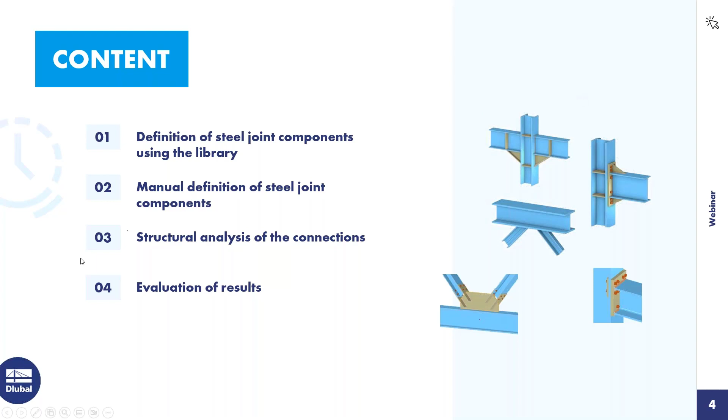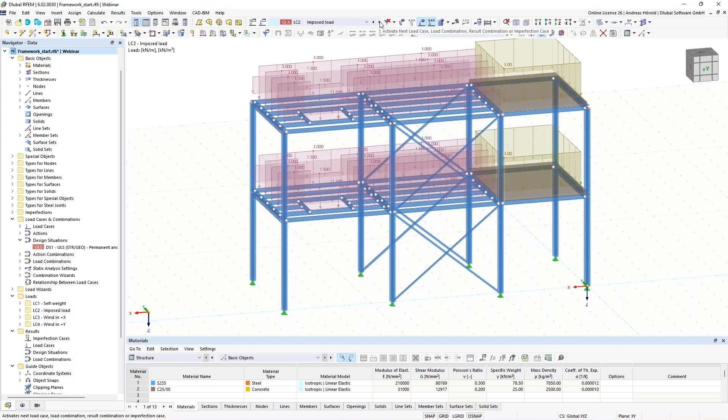Now I turn to the program, RFEM 6. A simple model, a framework with frames in one direction and bracings in the X direction. We have several load cases, for example the self-weight load case, the imposed load, and two wind load cases, one in X direction and one in Y direction.

We also have several combinations and a design situation. To design the steel joints, I activate the add-on here at the top left under base data. I open the dialog, and under add-ons it's already activated - it's from my test. The standard is also already set for the load case classifications, standard, and national annex, in this case for Germany, for the steel joint design.

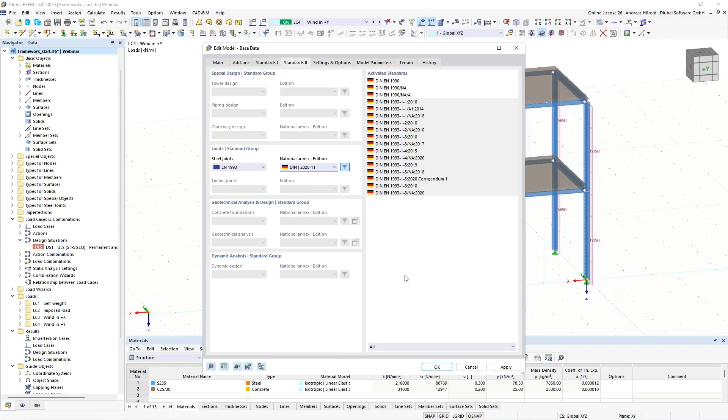Once the add-on is activated, there are two new folders: the types for steel joints, for the creation of the joints, and at the bottom the steel joints design, with design situations and ultimate configurations. I will show you that component, the ultimate configuration, in the next dialog.

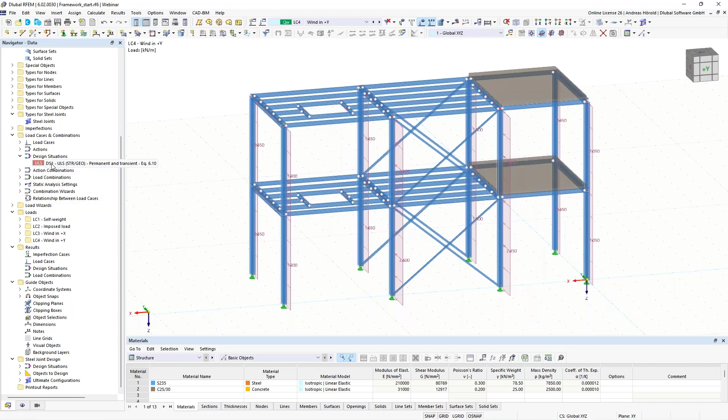But before that, I go to the design situations. You can see again the load cases here, the actions, and the design situation. It's important that if you activate the add-on, by default the steel joints design is activated - just note that it is here. Then those are the action combinations and load combinations, and those load combinations are included in the design situation. You can see that here in the overview.

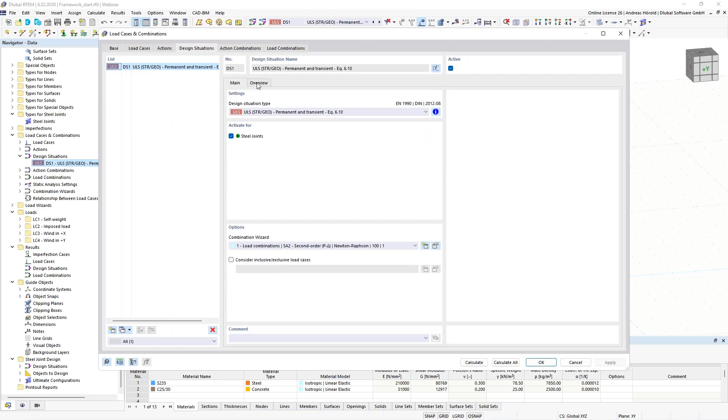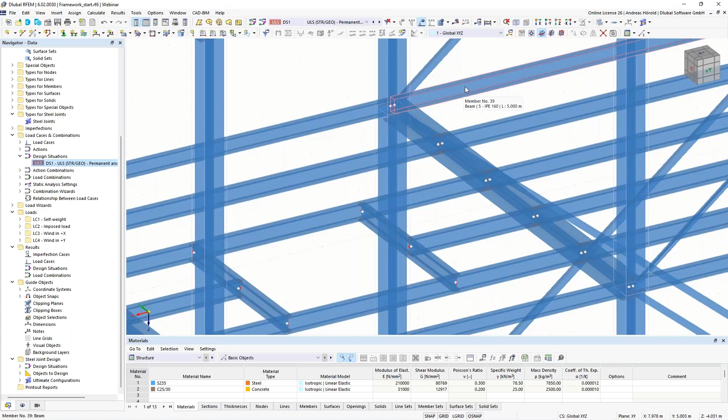So we can leave the dialog and start with the first steel joint. Let me show you that in the model. I would like to use this node here, and I will define all connections for it: the rigid connection of the steel frame, the pin connections of the platform beams, and the two connections for the bracings, which are L sections.

Let's start. Right-click on steel joints on the left side in the navigator data, and select new steel joint. First I select the joint, the node - sorry, node 33, and I apply that. There are 7 members that have their end or start point at that node. We can click through them.

Member 1 is the platform beam. That's the bracing, the frame or horizontal beam of the frame, the upper column, the lower column, the other platform beam, and the upper bracing.

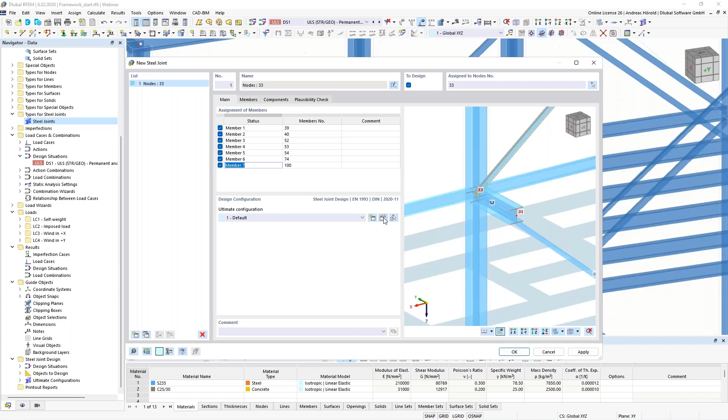Here you can see the design configuration. I open it - you can perform a buckling analysis. Then you can see the standard settings here, the maximum number of iterations - you can increase that, for example. Then you can also increase the number of load increments.

That's the standard setting, limit plastic strain, that's the value from the standard, and so on. I leave all settings as they are, also the safety factors here.

If you want to perform a buckling analysis, you can go to that dialog. You can also increase the number of lowest eigenvalues and number of iterations. That's the limit load factor from the standard, it's 15 according to the Eurocode.

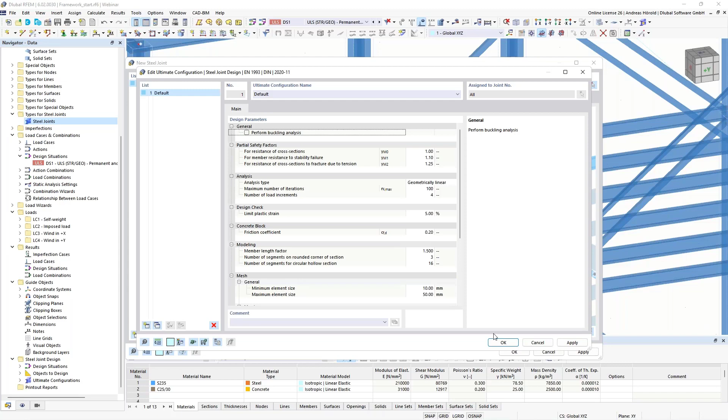Okay, then we go to the next dialog, members. The finite element analysis requires at least one member to be supported.

I select the lower column. The column is in reality supported here, and I will support at least this column. Okay, and we define also that the column is continuous. That's automatically overtaken for the two columns.

So the member settings, you can see here the member settings from RFEM, S235, and the sections, and we overtake the sections, of course.

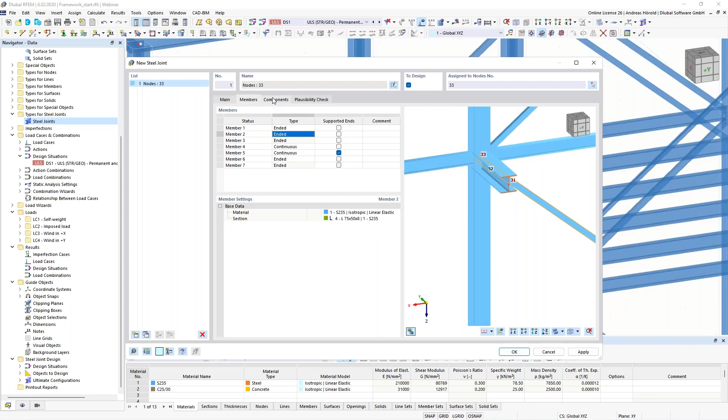So then under components, you can use the library, and you can create single components. I open it. You can see 4 categories.

The modifications: member cut, plate cut, we will use both of them. Then the plate editor: plate, stiffener, haunch, and so on. Then under connection elements: end plate, fin plate. Under others: the auxiliary plane, a help plane, then the welds and the fasteners.

Yeah, that's the current state of that library. We will extend that library continuously. A team of 8 members or employees are working on the development of the add-on steel joints.

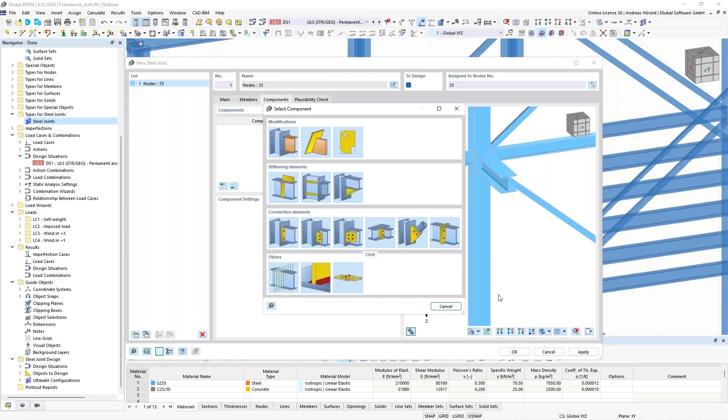We also extend the templates. I go to the template library. So there are also 4 general categories: the rigid connections, the pinned connections, truss, and the bracings.

I click through some examples: beam to beam, beam to column, with haunch, such a connection. If you download a trial version or you already bought the program, you can click through the single components. Maybe cross joint.

Okay, I will show you some pinned connections: beam to beam with cleats, fin plate, short end plate, beam to column, the same: cleats, fin plate, short end plate, and so on.

Trusses, you can use that for diagonals or for bracings. The K-joint, welded, such a connection. Also for bracings to use welded, it's quite new.

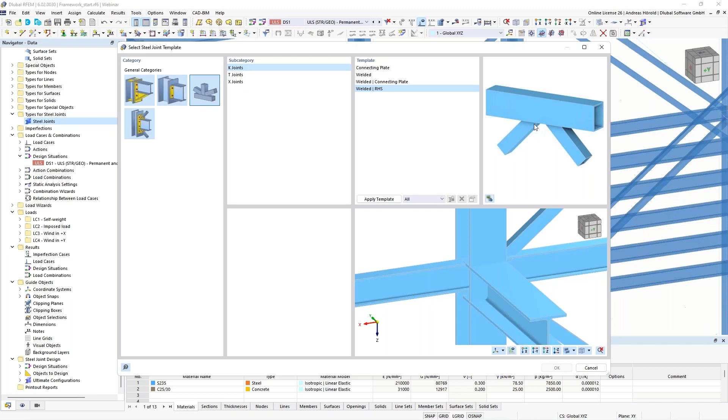The rectangular cross sections with a weld, T-joints, X-joints, and so on. Then last but not least, the bracings. Similar connection, such a connection.

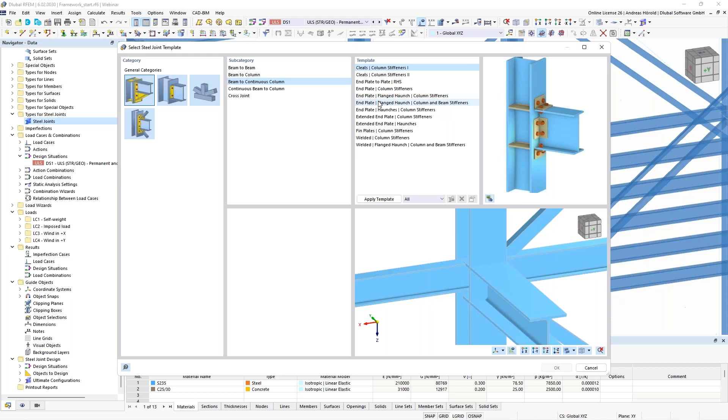But we will start with the first connection, the rigid connection. I use here the category rigid, beam to continuous column, and this one, with a haunch and column stiffeners. If I apply the template, we will see it in the preview here right at the bottom, and you can see we have to modify that connection. We leave the dialog with OK.

And we go through the single components. So I extend the window a little bit. Okay, so then we start with the end plate.

Member 3 is okay, you can see member 3 is selected if it is chosen. Then the reference member is the column, you can see it's selected.

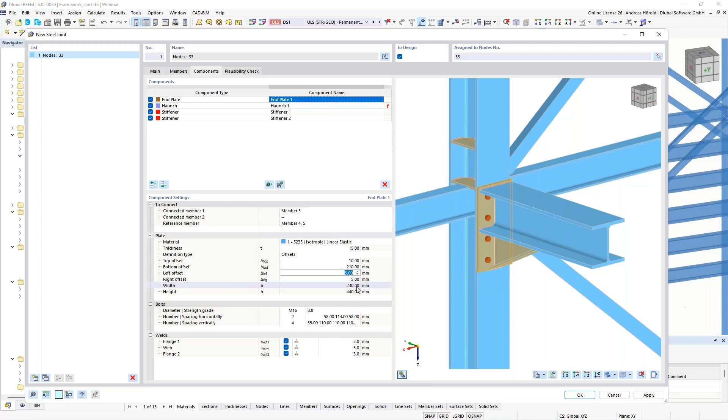We use a thickness of 15 millimeters, then 210 millimeters bottom offset. Left offset, We don't need an offset, we say 0. Okay, on the other side also 0. The rest is quite okay.

So then the bolts, we use a diameter of 20 millimeters and a screw strength of 10.9. So then you can use our values here, it's quite okay for this connection.

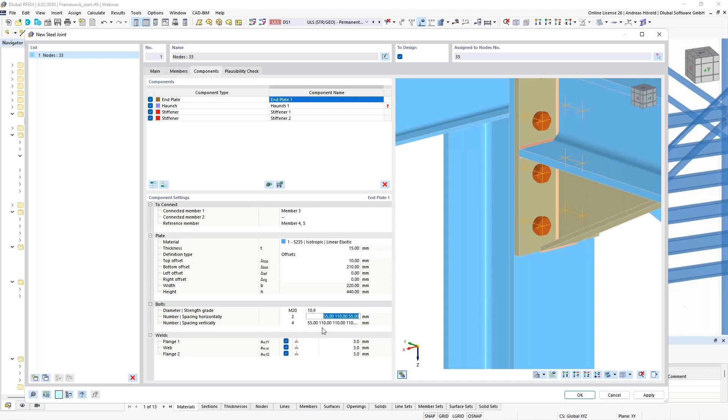I will only change the vertical spacings, I use only 3 bolts. Okay, and I only entered the first 3 values: 70, space, 95, space, 150, and the last dimension is calculated automatically.

Okay, then double fillet welds for the flange, 6 millimeters, then 4 millimeters, and also 6 millimeters.

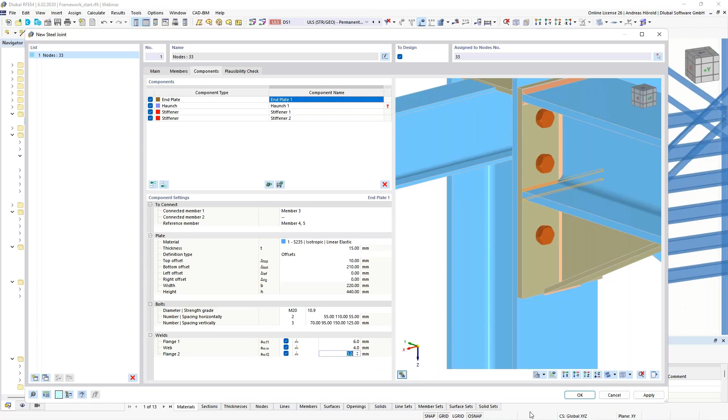Okay, now but you can see we have to modify the haunch, that's the next step. So member number 3, that's okay.

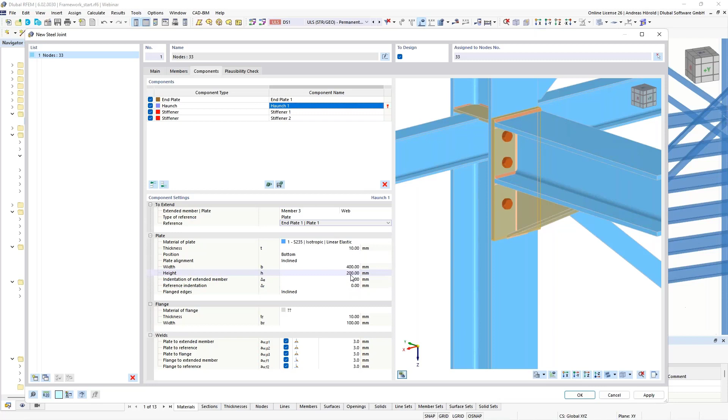So then plate is also okay, and plate 1, that's okay. So the other values are also quite okay. I decrease that value, okay, and you can see now it's okay.

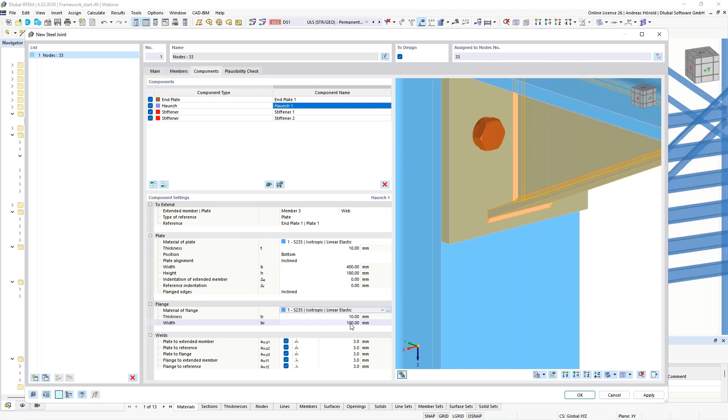So then I have to define a material for the flange, we use also the 235 steel. So then the width can be larger, 200 millimeters in that case. Okay.

So then the welds, that weld here, you can see it's selected, 4 millimeters. Now we can leave the double-fillet weld. Then this weld also, the double-fillet weld, 4 millimeters.

Then plate to flange, this one, also 4 millimeters. So then the flange extended member.

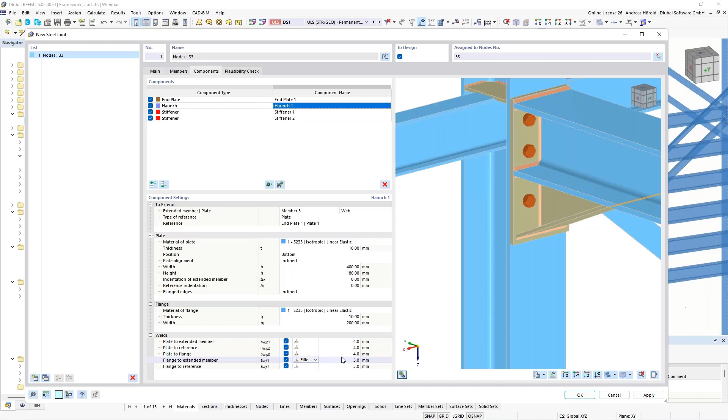Now this one, we use another weld, a butt weld on the rear side. And for this flange to reference weld, we use a double-fillet weld, 5 millimeters.

So the haunch is quite okay, but the stiffener is not. That stiffener should be adjusted. Let me check the values. Yeah, okay, I only defined a weld of 4 millimeters. But we have to move the upper stiffener here.

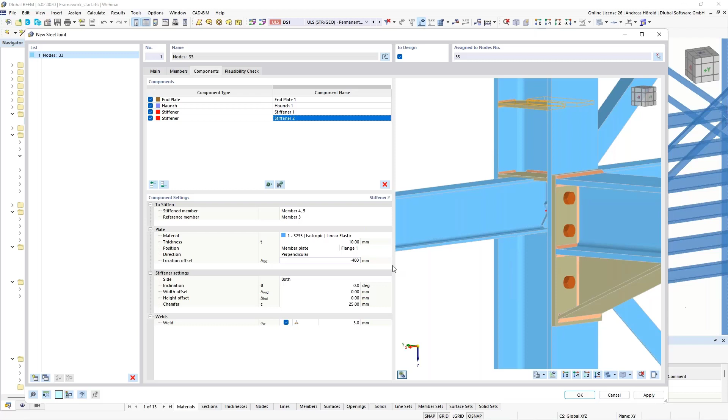So the value is minus 400. Okay, and I've also got to change the weld. Okay, the rigid connection is finished.

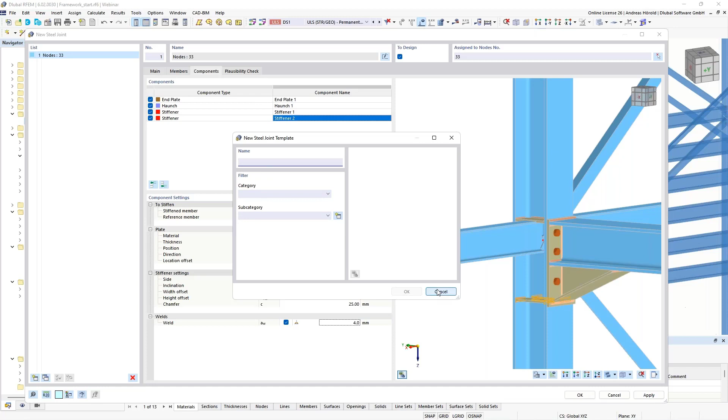And it would be possible to save it as a template, for example, to use it for the other rigid connections, for the frame, on the edges of the framework. You could press this button here, save component as template. You can give it a name, select the category and subcategory, and so on. Okay, I don't do that.

I continue with the connection of the platform beam, of those beams here. So for that I use a component at the end, an end plate, this one, end plate.

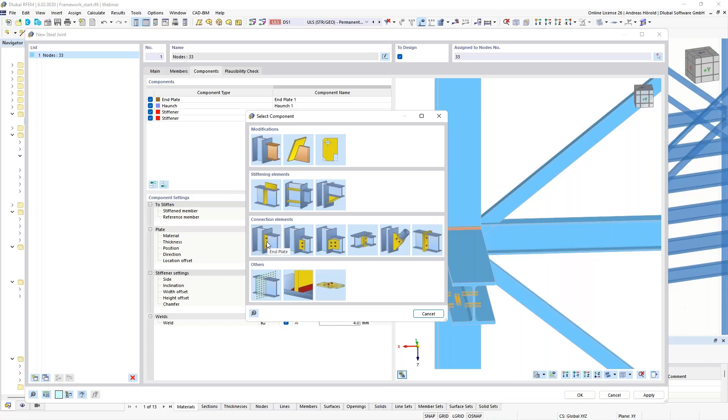So connected member is member 1, this one. And the reference, or the other connected member, is the member on the opposite side, member 6. The reference member is the column, members 4 and 5.

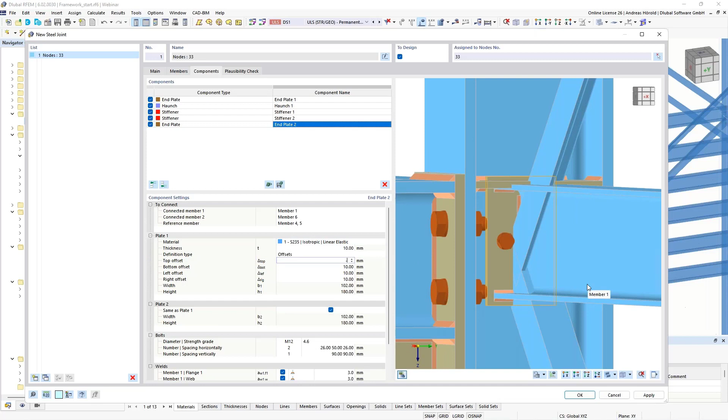Okay, now you can see the end plate. Same material. I decrease that value here. Now we don't want to connect the flanges. Also on the lower side, minus 20.

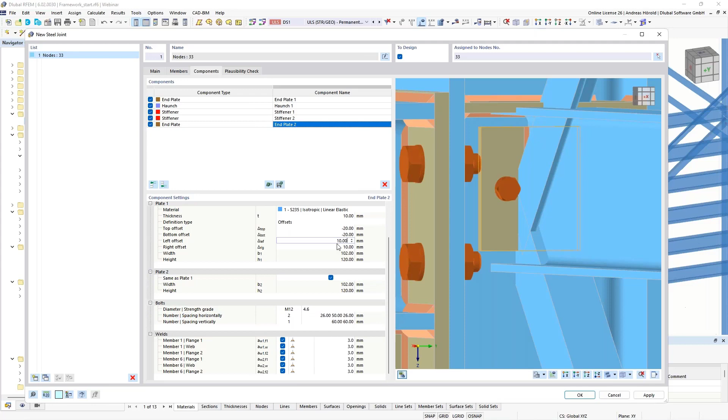Okay, the rest is quite okay. The opposite plate should be the same. It's on this side. Now you can see it here.

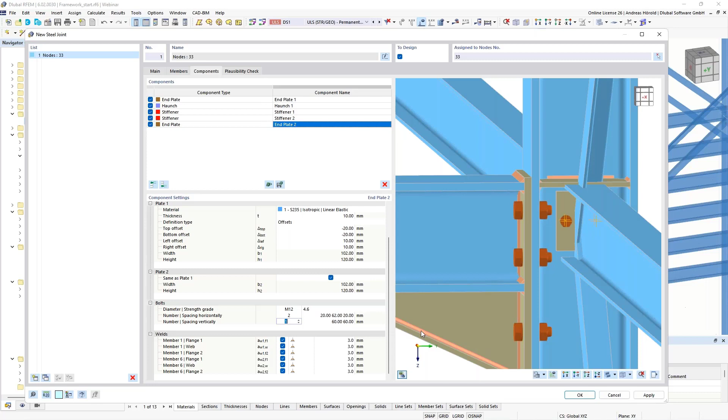So then bolts M12, it's okay. 4.6 as screw strength, also okay. Then I enter the value 20, and the rest is calculated automatically.

So then I also use 2 vertically, and enter the value 35. That's good. So then we turn to the welds.

We don't connect the flanges, that's why we deselect our flanges. Only the 2 webs should get a double-fillet weld, and the value is 4 millimeters.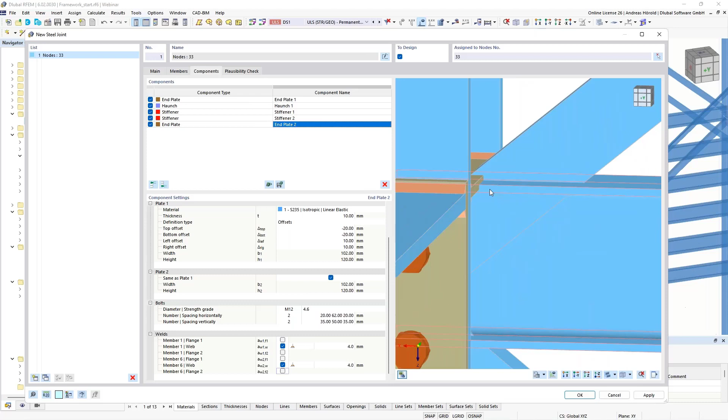So now the 2 end plates are finished. Not yet, sorry, we have to add a cut here. It's in conflict with that plate here, the plate of the rigid connection.

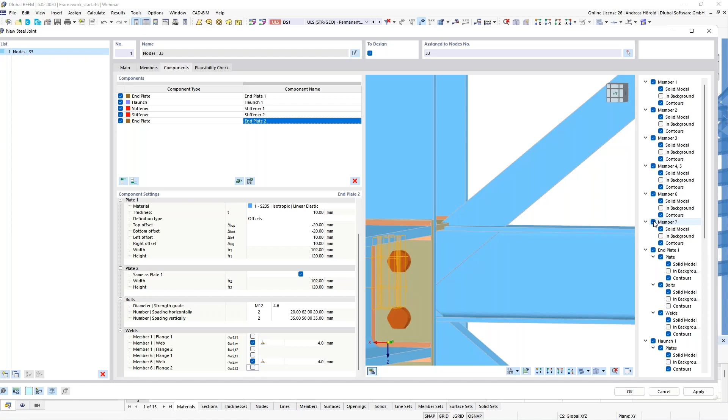To get a better overview, I use this button here at the bottom and deselect member number 7. Now it's better to see, I think.

So I add a member cut. Which member? Member 1, by plate. And cut via stiffener 1, plate 1, that one here.

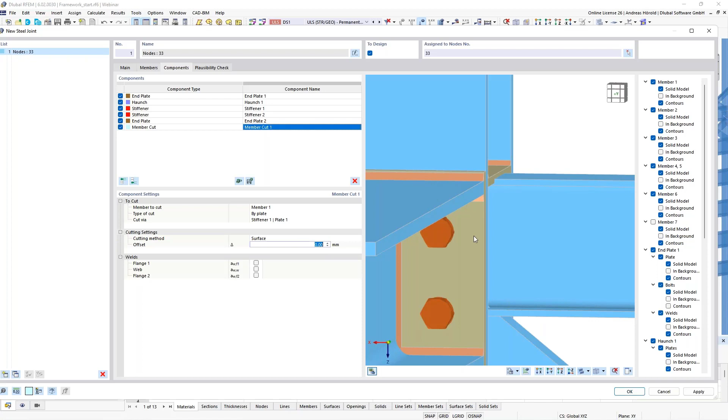So, surface with an offset of 15 millimeters. And now you can see the cut.

Okay, to have it on the opposite side, I can copy that. That's also a new feature. By right click, I copy the components at the end, only this one component.

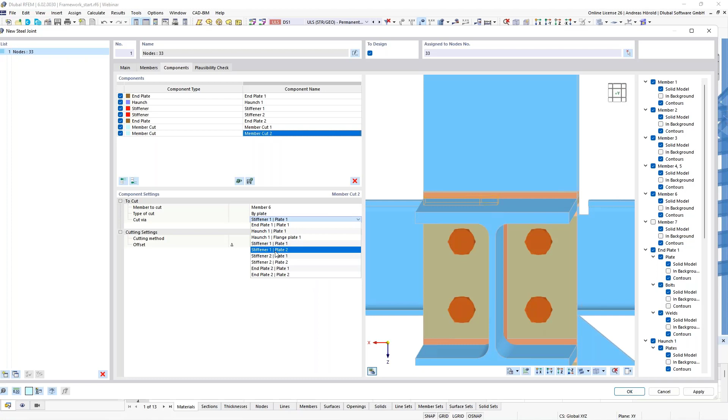And I have to define another member. In that case, member number 6, the left side. And the cut is via stiffener 1, plate 2. So you can see it.

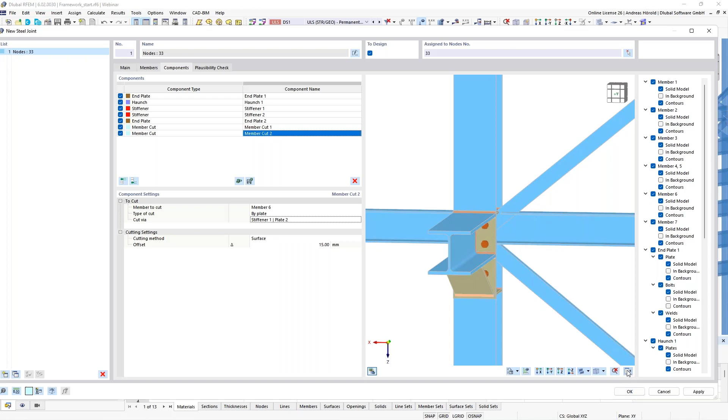So now the rigid connection is created, and also the pinned connections, and we continue with the bracings. I select number 7. Okay, I can close it to have a better overview.

So, since we haven't got this component that I want to use in the library, I have to create it with single components. It's a little bit more complicated, but you can see that it's very flexible. You can define almost all connections with the single components.

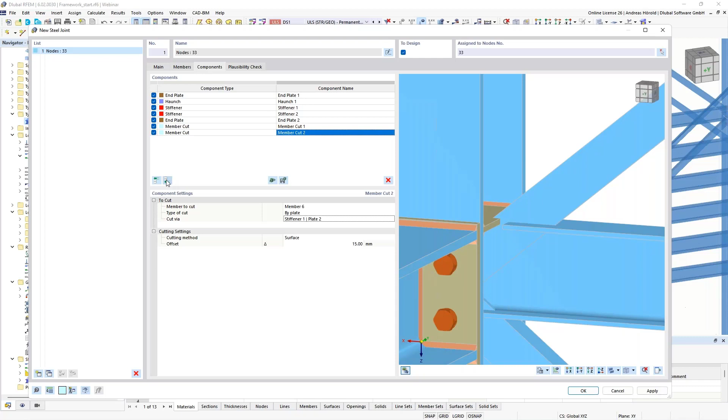So I start with a plate, stiffening elements, plate. The material is S235 again. The thickness should be 8, then 250, and 170.

And the position should be a member plate. So, that's member number 7 and leg 1. And you can see it in the preview on the right side.

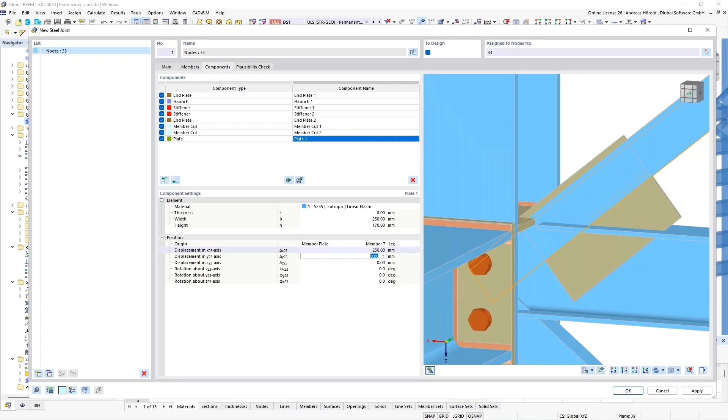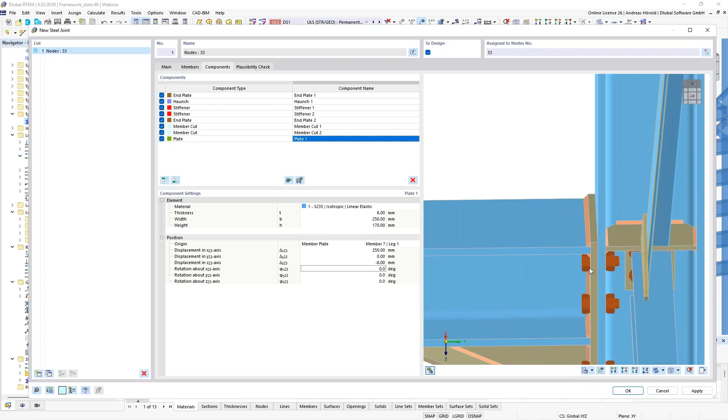That's the difference between the static model and the connection model. The axis of the L section is here, and the axis of the horizontal beam here, and the plate now has an offset.

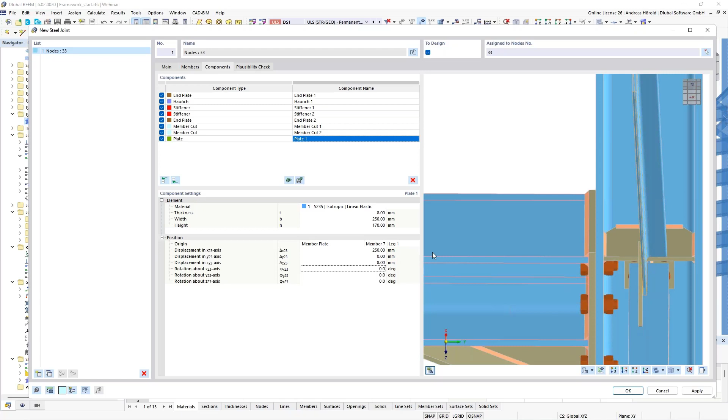You can avoid that if you define an eccentricity for the bracing in the RFEM model, or you can ignore it for the steel joint design. I ignore it for the steel joint design. It's up to you how to use it. That's the difference between the axis model in RFEM and the detailed connection model.

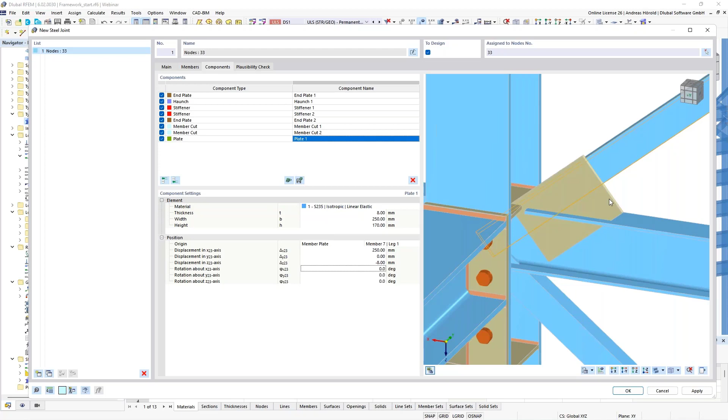Okay, the plate is not finished, we have to enter cuts. I enter this plate cut. Yeah, the plate is number 1, by member plate.

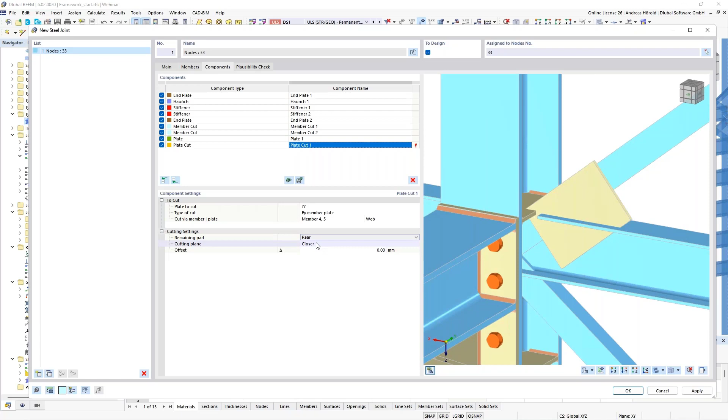Cut via, I select the column, and the web of the column should be the reference point. Okay, the rear side, closer end is the cutting plane. So we can do it step by step.

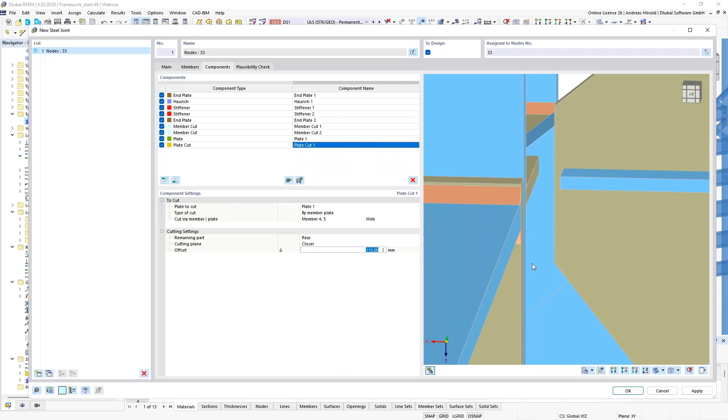No, that doesn't. It doesn't take the plate number 1. Okay. You can do it step by step, or calculate which is the right place. I would like to have the plate cut here at the end of the member cut, and that's 120.25. Okay, this cut is quite okay.

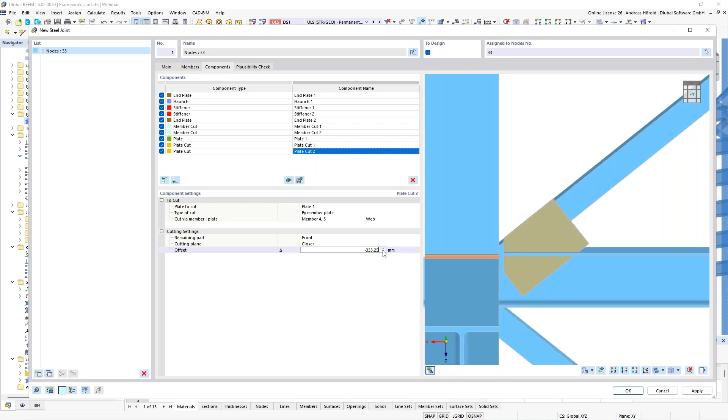We enter a new cut. So again, plate number 1 by member plate. That's the same again. Member 4 and 5, and the web. That's the reference point. Front, the closer end, and I enter minus 335.25. Okay. Only one cut is missing.

Plate cut. Again, plate 1. So now by member plate. And this time member number 1. You can see it selected. And the upper flange, flange 1. Okay. The rear side. Yeah, and that's all. I only have to enter a double fillet weld of 4 millimeters.

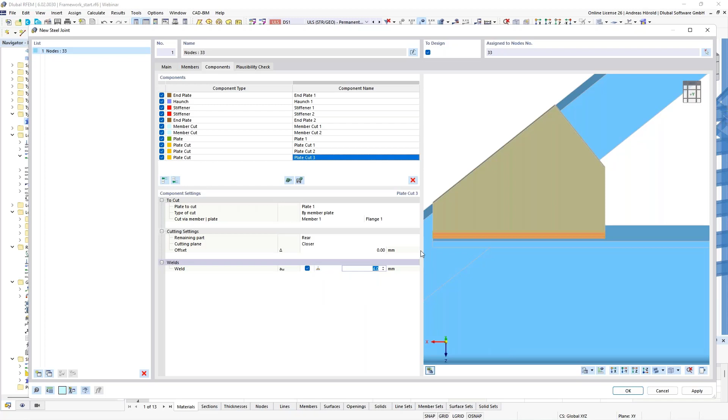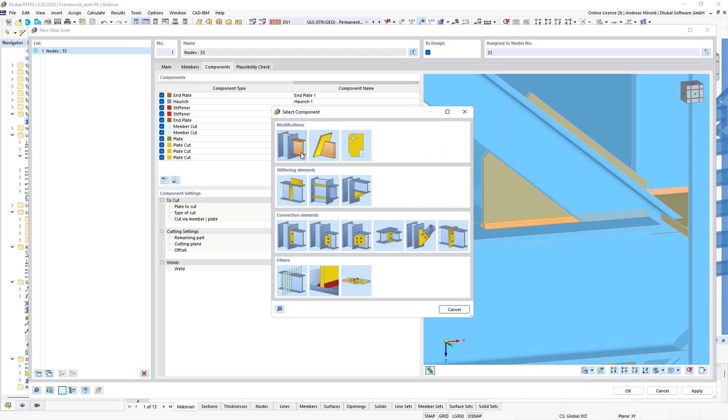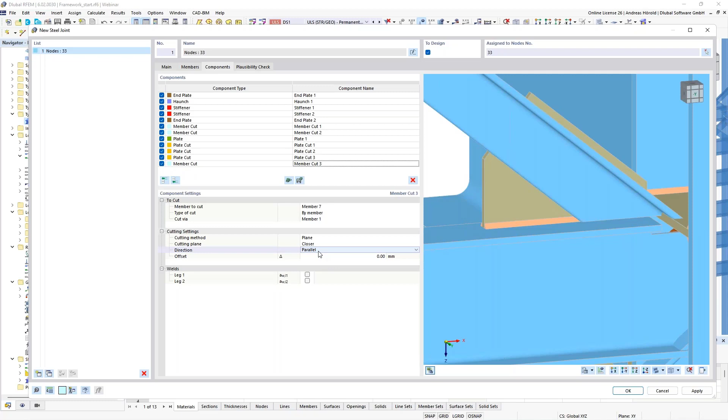So now we have to cut the member. Now you can see it's in conflict with the other parts of the connection. So I enter the next component. Here left above, a member cut. The bracing is the member number 7. By member number 1. That's the platform beam, the horizontal beam. Then it shouldn't be parallel, but perpendicular. And a small offset. Okay.

So now we have to define the bolts, means fasteners. I add the component fastener. The component is member plate, member 7, leg 1. The other component is the plate number 1. So that's okay.

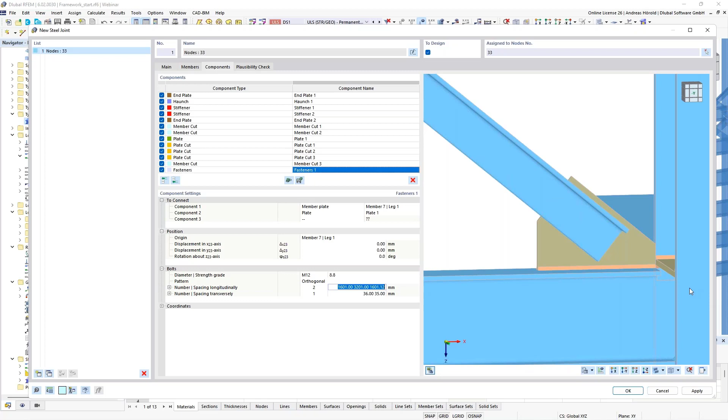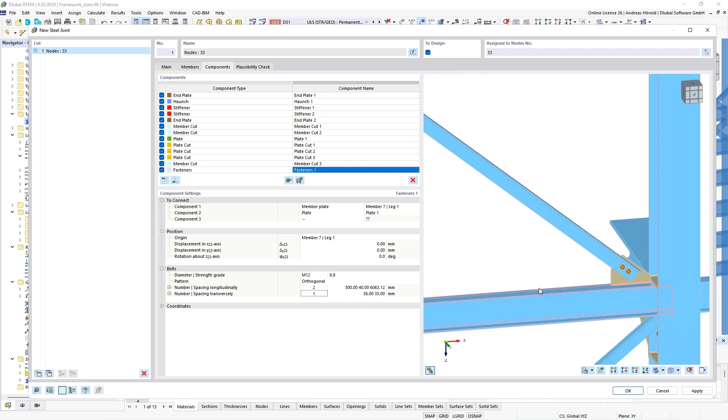M12, I use another screw strength. You can decide by yourself. I, for example, use 8.8 this time. So, and that's the distance from the crossing here. 300, then space, and the distance between the screws or bolts should be 40. And that's all. And now the connection for the upper bracing is finished.

For the lower bracing, we use the same function. I copy that. So I copy the last 6 components. I select all. Then I do right click and copy components at end. So now it's the same, the same connection, and I have to modify it. So that's plate number 2. I start with plate number 2.

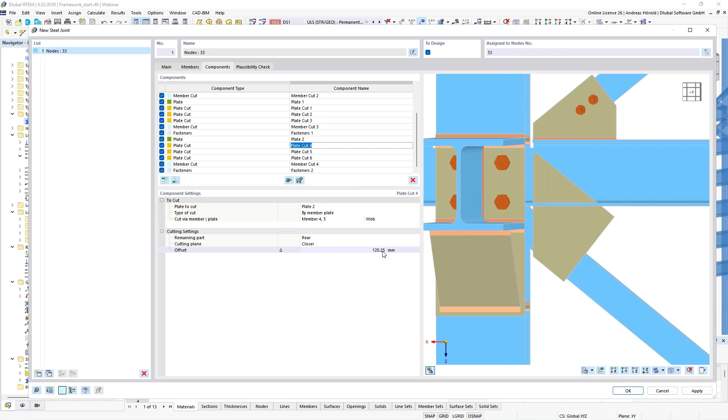So I only define here another value, member plate, but this time another member. The member number 2, the lower bracing, and leg 1. I hope you can see that it is selected. Okay, then the values are almost okay. 90. Okay. So then plate cut 4. I use another value. Yeah, you can see the 45 millimeters are okay for this connection here.

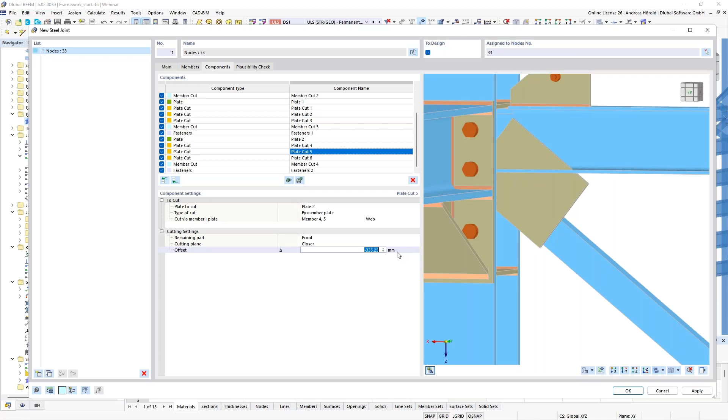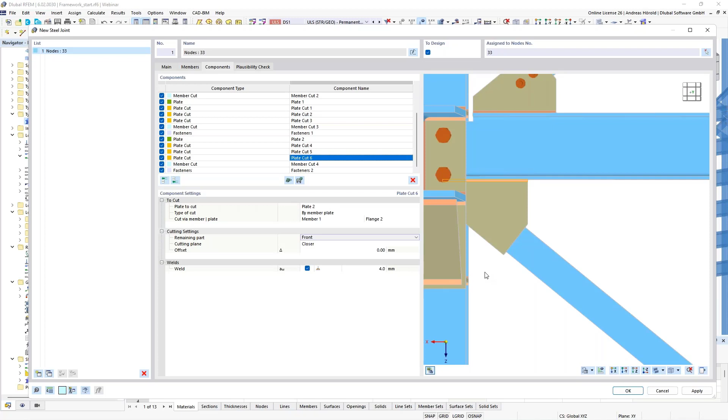Plate cut 5. That's also okay. Minus 265. And only this plate cut here, the flange, is missing. Flange number 2, the lower flange. Then the front side. Well, and that's all. So then the member cut, I rotated it a little bit, but you can see all. This time member 2. Yeah, and that's all.

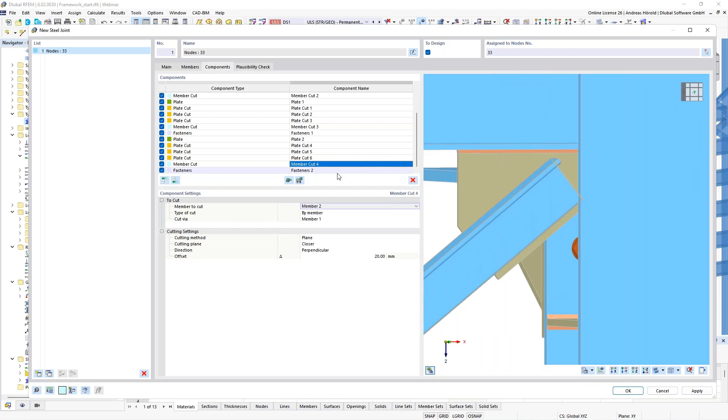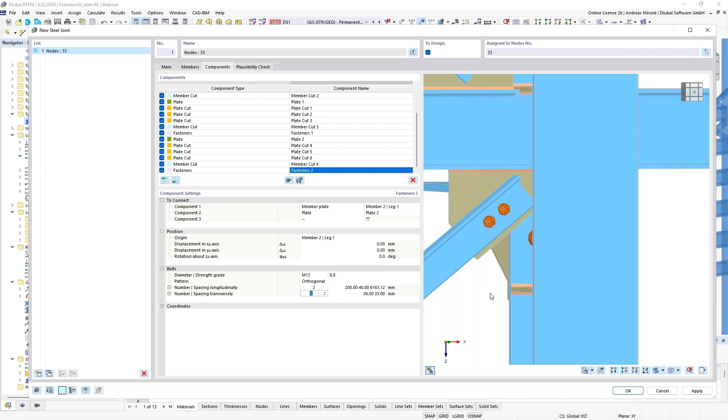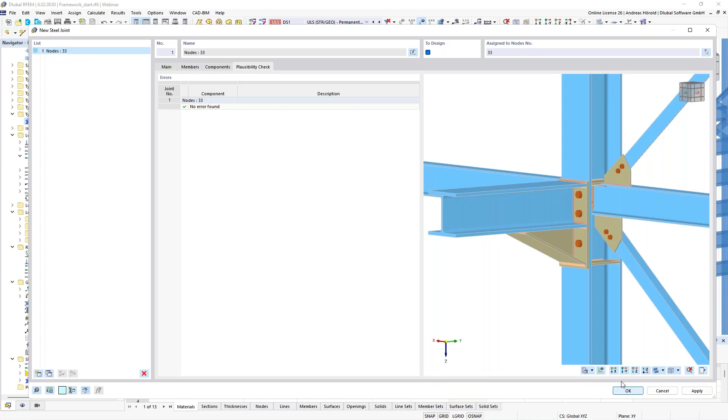Only the fasteners need to be modified. Member 2, leg 1. So, 200 space 40, and that's okay. So you can take a look if everything is okay, and you can do a plausibility check. Yeah, no errors found. Now that's quite good. Okay, I leave the dialog, and you can see the connection in the preview.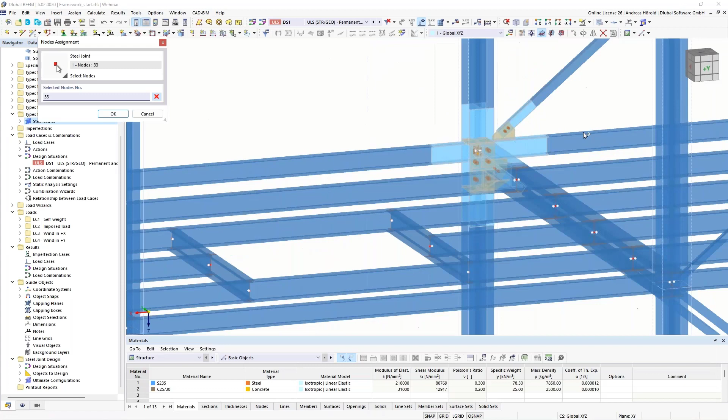If this button here right above is activated, you can also activate no joint model or simplified joint model. Now I will use that. So, and now I can also use that connection for the other 3 nodes here. So I can, for example, open the dialog by double click on the connection, and I can select the other 3 nodes. Okay, so I apply it. And now we have got 4 connections, 4 similar connections.

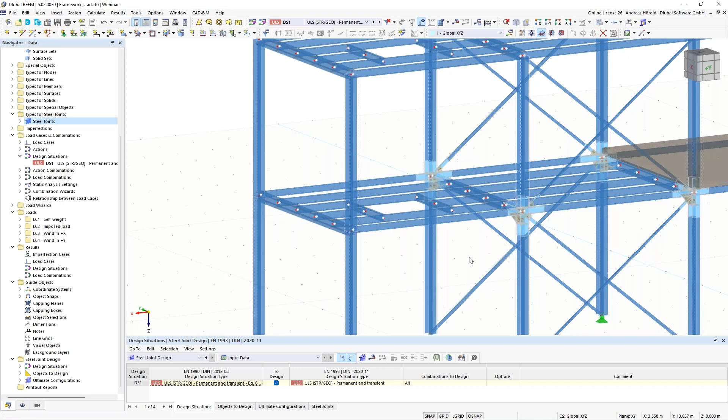So then we can open in the table here the steel joint design. And if I press that button here, the calculations would start. I skip the calculation. Yeah, the calculation time is about 15 minutes on my computer. I skip the calculation time and I open the calculated model.

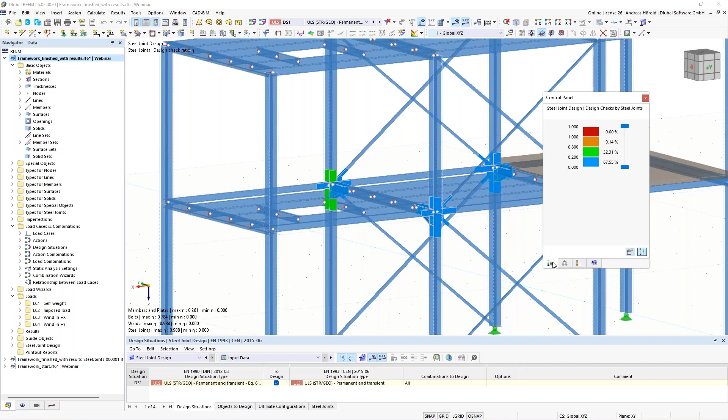I open the panel, and you can see the ratios here graphically. That's the connection with the highest ratios. I go through the table, Steel Joints, stress-strain analysis. You can see the design ratio by design situations, by loading, by joint, by node, by components.

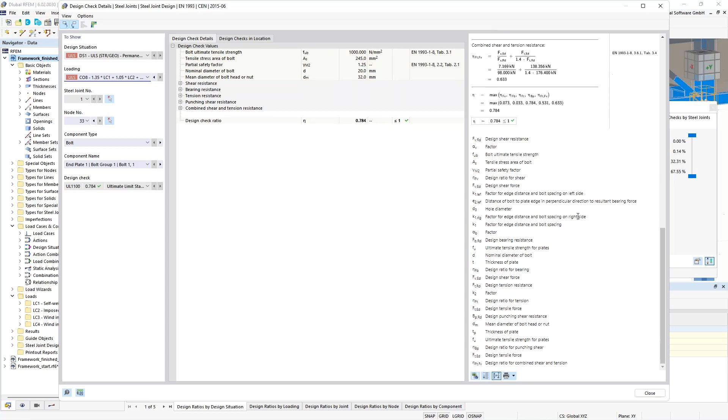If you go, for example, to that line here and open the design check details, then you can see all formulas from the standard for the bolts, also where you can find the formulas in the standards, and so on. You can also switch between the designs here: plate, weld, the welded design, and so on.

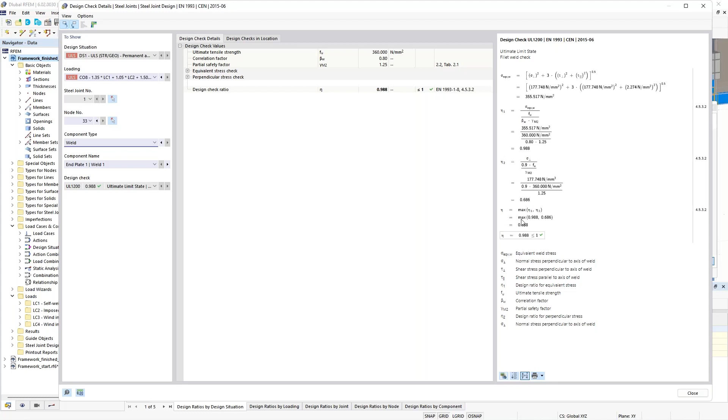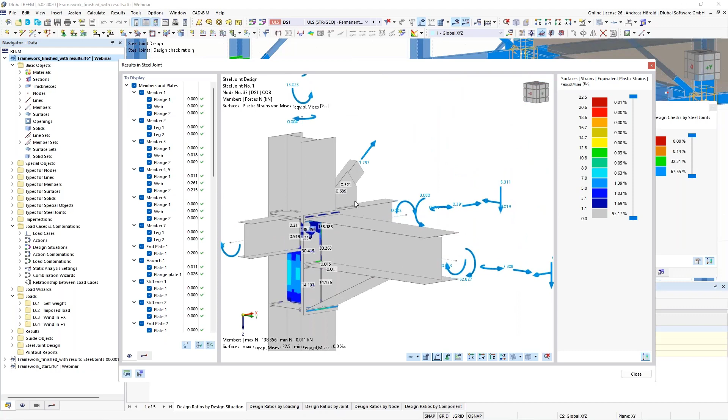Then when you click that button, the results in Steel Joints, you can see the detailed model. So it's the whole connection. You can see the ratios here graphically. The gray area is a new feature for values that are not of interest, for example very small values. You can click through the single components, deselect, for example, the members and plates.

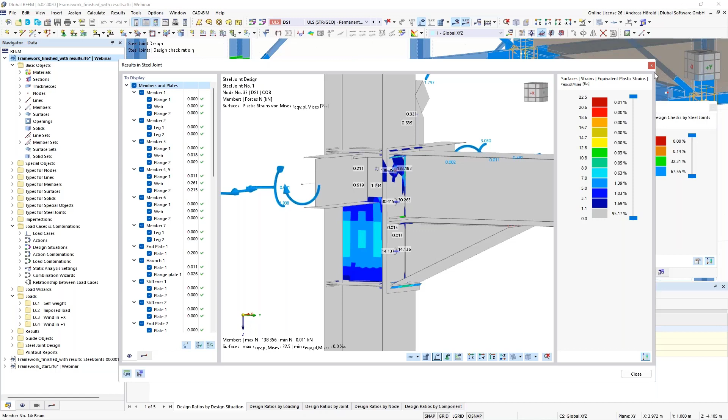Now we see, for example, here the welds and the maximum design ratios. And you can go through all. So then you can save that submodel here with that button at the bottom left, and you can open it.

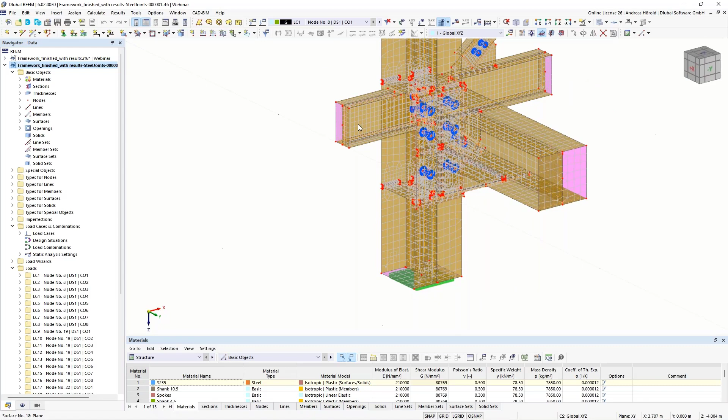And that's the submodel with surfaces, the supporting of the column, horizontal beams as surfaces, the bolts, the welds. You can see a simplified model with surfaces and rigid links here.

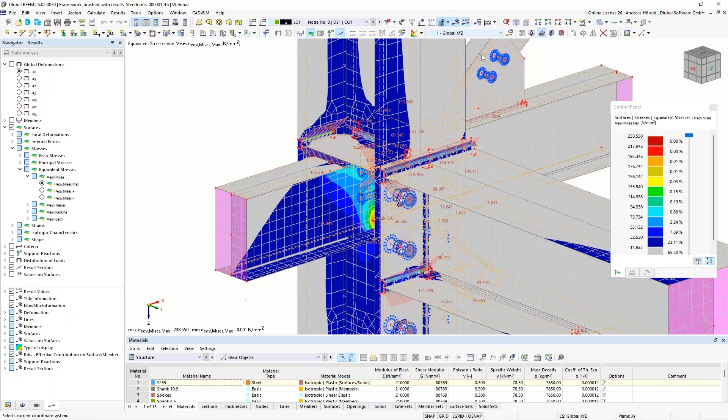Then we can also take a look at the results on the surfaces. For example, here surfaces equivalent stresses, the sigma max von Mises. And you can add dimensions here and print it in the printout report. Did I forget anything? Well, I think no. That should be all for this connection.

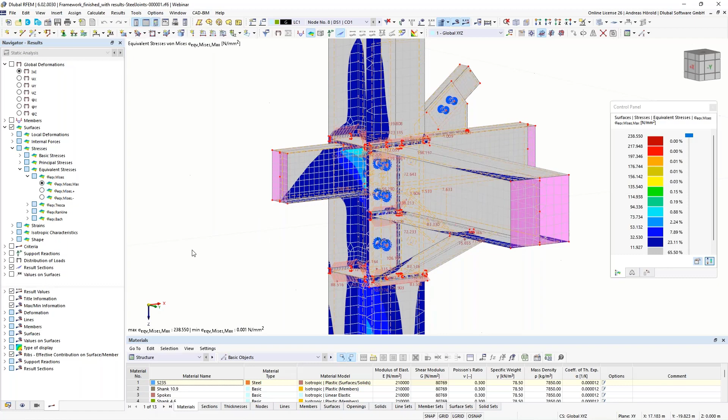I switch to another RFEM window with other connections that we already prepared. You can use the plates behind the flanges here for such a rigid connection. Quite new is the welded connection of rectangular hollow sections. You can see the weld on the fillet is missing. We are working on it. At the moment you are on the safe side. Only the straight components are connected.

We are also working on the implementation of the round hollow section, and when we release it, I think the welds on the fillets here are also ready. Also such a connection. Then other connections are, for example, the diagonals for a truss. Here's another connection. It's not practical to use different connections on one truss, but we would like to show the different options in that model here.